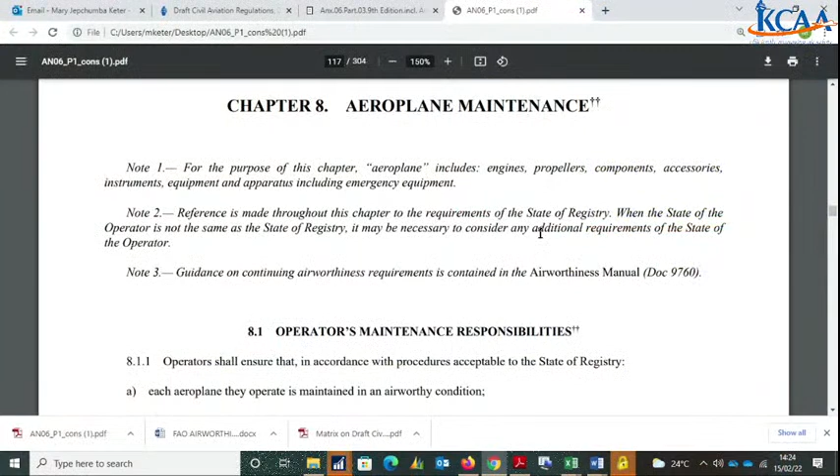We thought of doing this because one stakeholder yesterday said he had sat with even lawyers and never found where these things are. But it's good to make it clear for all of us that they do exist. Up there is from online, that's the ICAO platform, ICAO portal. We have Annex 6, Part 1. This is on commercial air transport operations. The topic there, Chapter 8, is aeroplane maintenance. It's not talking about AOC. It is the aircraft in this AOC.

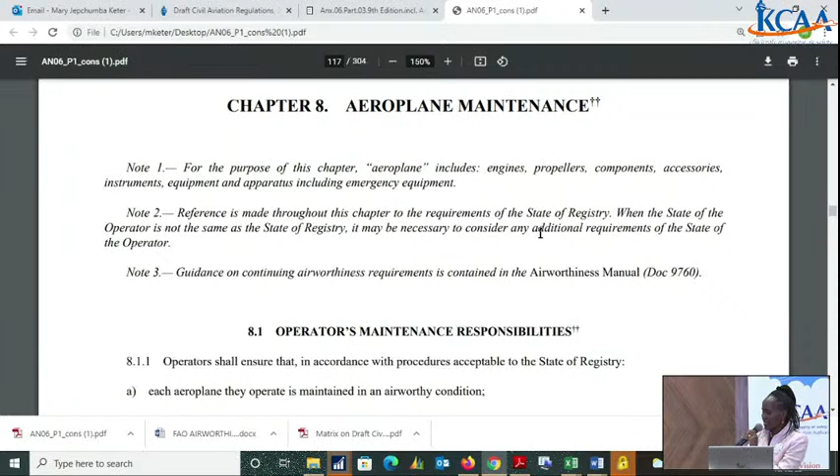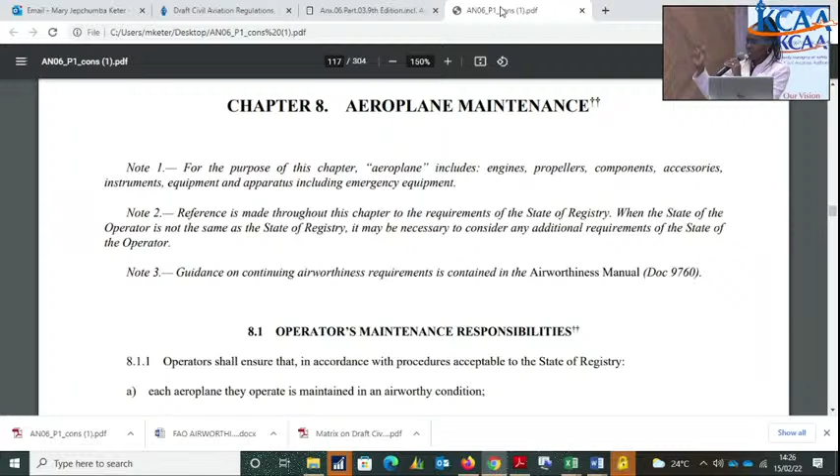So in Annex 6, Part 1, commercial air transport, and then Annex 6, Part 3 is the same, but a different chapter. It's there, helicopter maintenance. But what ICAO has done, we will use Annex 6, Part 1 as an example for the helicopter because it is a copy and paste from ICAO. The only change there is the aeroplane and the helicopter insertion in Part 3 of Annex 6. We will not read, but the title is Aeroplane Maintenance. If we go down to 8.1, Operators Maintenance Responsibility.

We are highlighting this because when the floor says the work of an engineer is just to open panels and screws, we want to demystify and really know what is the role of an operator when it comes to maintenance of his aircraft. If you look at 8.1.1, it's pretty straightforward. And these are standards. They are not recommendations by ICAO. That 8.1.1 we have already taken on board in the AOC and administration regulations and operation of aircraft regulations for commercial air transport. The operator shall ensure that, in accordance with procedures acceptable to the state of registry, there is A, B, C. That is the role of an operator.

8.1.2 has since been superseded. The end of it was until 4th of November 2020. So in our regulations, you will still find that requirement, but through this amendment, we are inserting the new requirement of 8.1.2, which we have already inserted. That's a new regulation. It says 8.1.2, that as of 5th November 2020, the operator shall not operate an aeroplane unless maintenance on the aeroplane, including any associated engine, propeller, and part, is carried out, A, by an organization complying with Annex 8. Annex 8 in this case is the AMO regulations, which have again been amended in line with Annex 8, Part 2, Chapter 6.

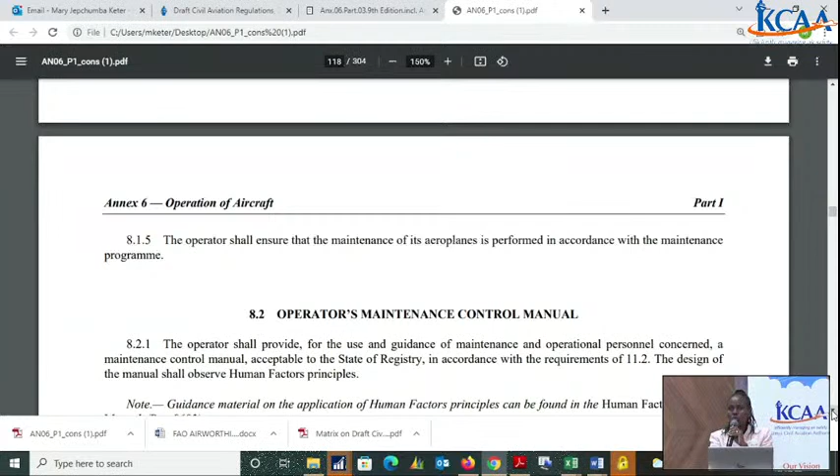Maintenance Control Manual, which is an AOC document. AMP is an AOC document, not an AMO document, as per ICAO standard. So if we are doing otherwise, please, this is the standard.

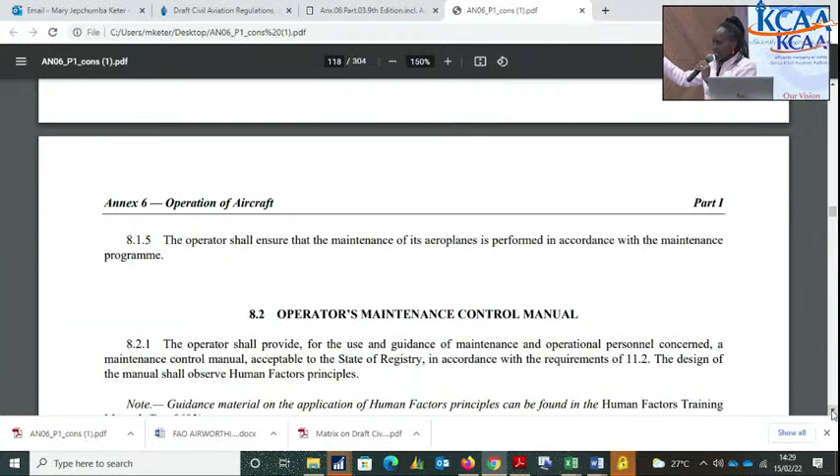And because one document which was mentioned was the one mentioned in 8.2, which is the MCM, we will not read, but the MCM should be in accordance with the requirements of 11.2 of this annex. Down at 11.2, you will still find the same things mentioned up there. Those topics should also be in the operator's MCM. But of key is the implementation. Now this is the annex.

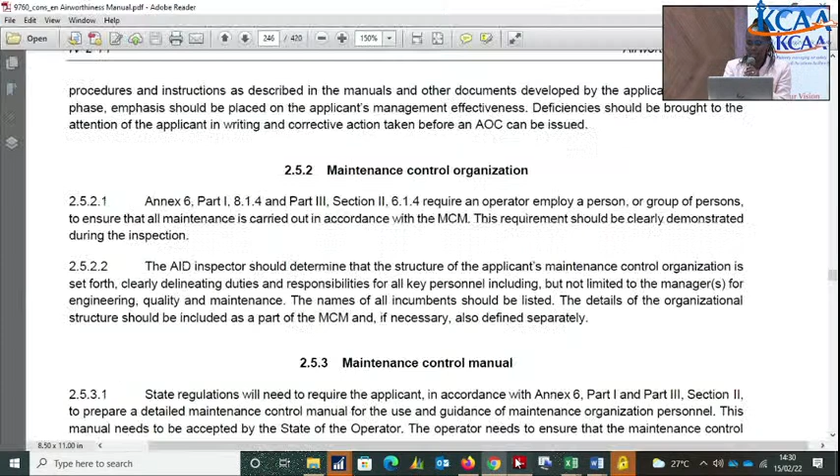This is the standard. You have to go to the implementation, which is given by ICAO in ICAO document number 9760. If you continue reading the annex, it will send you to ICAO Doc 9760, and it sends you to 2.5.2. Annex 6, Part 1, 8.1.4, where it was calling for employment of a person or persons, and Part 3, Section 2, 6.1.4, which is the helicopter maintenance, copy and paste as is, require an operator employ a person or group of persons to ensure that all maintenance is carried out in accordance with the MCM. This requirement should be clearly demonstrated during the inspection.

2.5.2.2 is now where the management personnel comes in. The AID, in this case the Airworthiness Inspector, the inspection department of KCAA, should determine that the structure of the applicant's maintenance control organization is set forth, clearly delineating duties and responsibilities for all key personnel, including but not limited to the manager or managers for engineering, quality, and maintenance. The names of all incumbents should be listed. The details of the organizational structure should be included as a part of the MCM, and if necessary, also defined separately. Is that short and clear? This is what we seek from the floor.

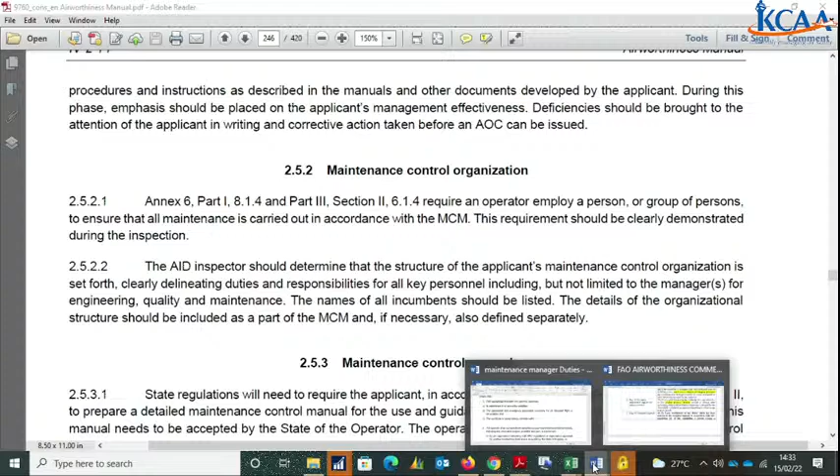Then it looks like this manager engineering and maintenance manager is not just any other liaison officer. It has to be somebody with those qualifications to do the duties which have been given. And you can see here clearly that the names must be there. Currently, we don't have those names because of the confusion. We take the aircraft to the AOC, dump it there, and go. But we've been given functions by ICAO, a few of which we have just sampled as a department, to see what are some of these duties of head of maintenance.

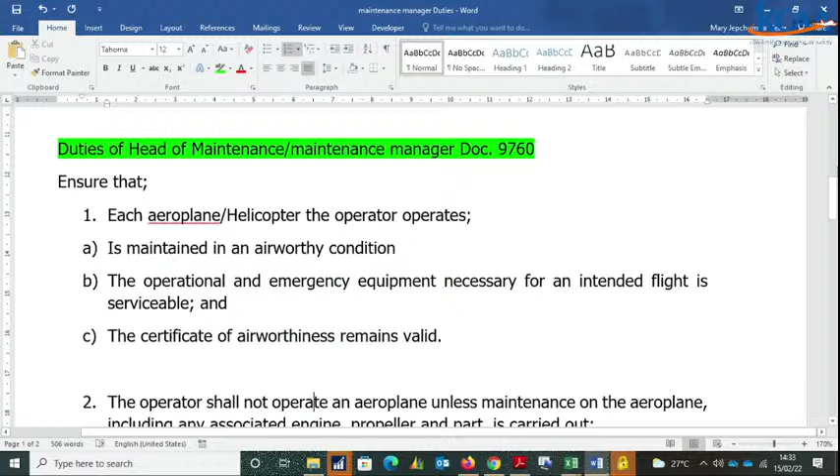One is to ensure that each aeroplane or helicopter the operator operates is maintained in an airworthy condition. Who will maintain this? It's a joint task. AMO will do the real maintenance, but again, even the AOC holder has a part to play on this side. And B, ensure that the operational and emergency equipment necessary for the intended flight is serviceable. It goes on and on. The list can be very long.

If you look at number C, the certificate of airworthiness remains valid. I don't think the AMO cares much about your CofA. Yes, they will take the aircraft, do all the maintenance, but whose responsibility is it to make sure that you apply for CofA renewal, issuance, all those things? So it's the role of this operator.

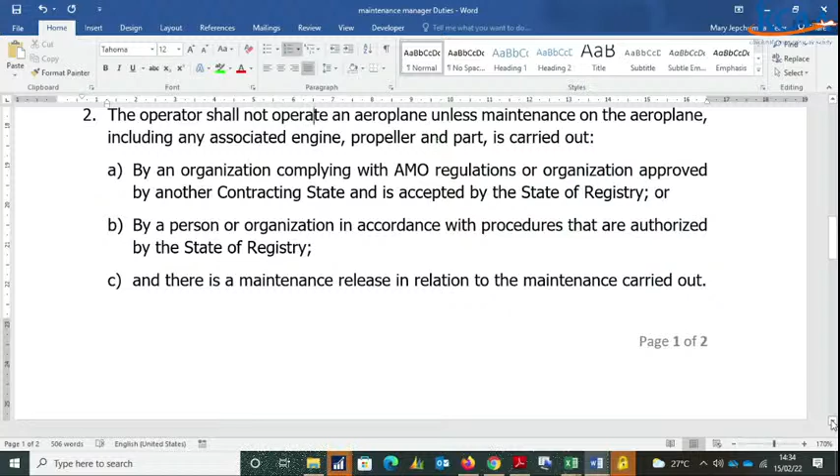And then if you look at number 2, a maintenance person will ensure that the operator shall not operate an aeroplane, as we have discussed up there, unless it is maintained by an approved maintenance organization or signed off by a person or an organization that has been approved by the authority.

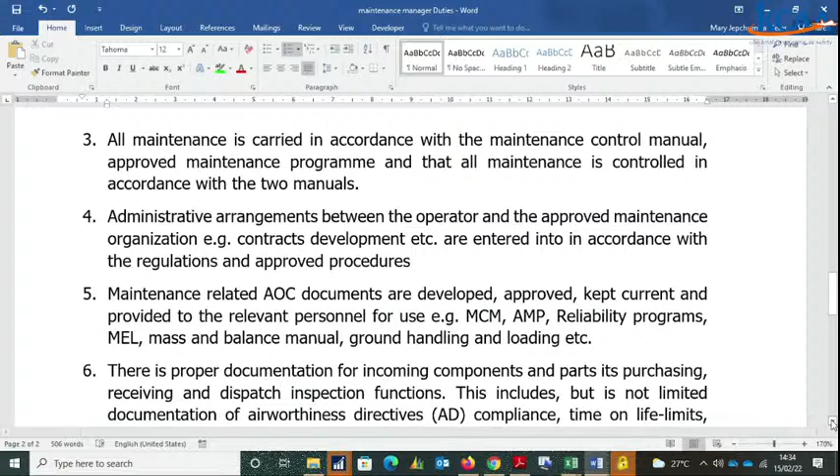3 is all maintenance. Ensure that all maintenance is carried out in accordance with the Maintenance Control Manual and approved maintenance program, and that all maintenance is controlled in accordance with the 2 manuals. 4, that administrative arrangements between the operator and the AMO, e.g. contract development and approval or acceptance, are entered into in accordance with the regulations and approved procedures.

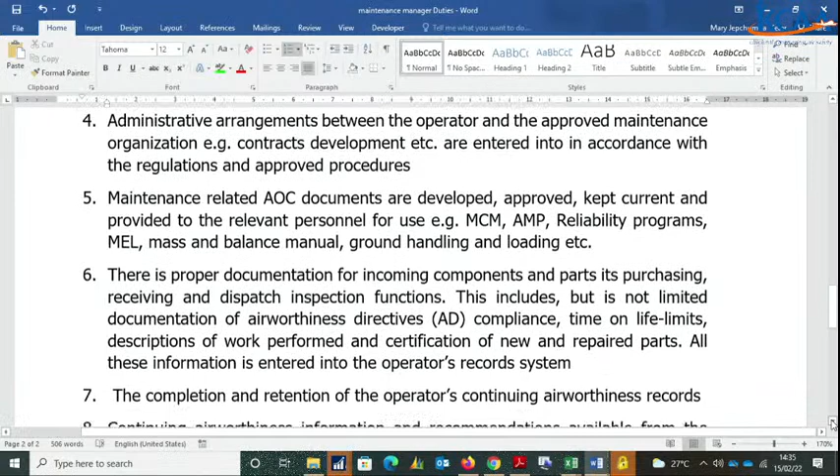5, maintenance-related AOC documents are developed, approved, kept current, and provided to the relevant personnel for use, e.g. MCM, approved maintenance program, reliability programs, MELs, mass and balance, ground, and all those manuals that we all know. So this list can go on and on. KCAA has not shared this list with you before, and that is why, even when we are approving your MCMs, every operator has a story to tell. We want to work together as a team.

And finally, I think with this kind of submission, we are all knowledgeable and we are all refreshed, so that the issue of qualification of that maintenance manager should come out clear for all of us, so that it doesn't look like one team wants you to do this and another one that. This is what we all want to stand by. Thank you very much.

Yes, I mean. I'm saying, eh? Yeah, sure. It's there. Yeah, it's a Word document, and we mentioned it's there. The doc reference is 9760. Please read through it. This is the Word document. Just project. Oh, okay.

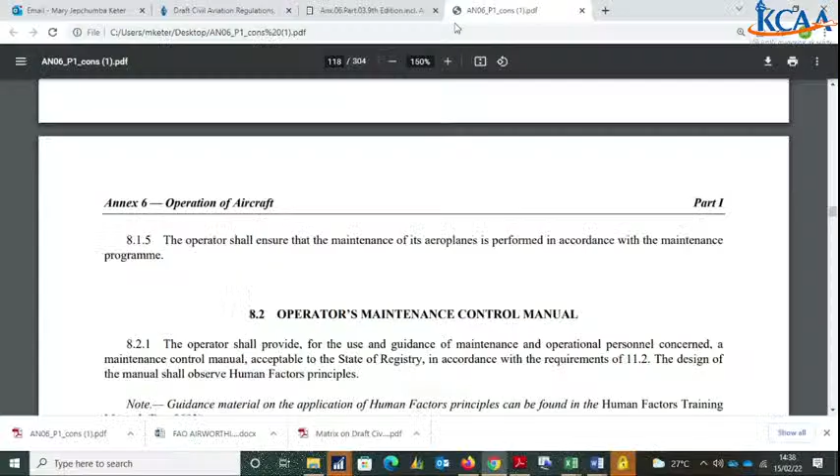Major, you go to Annex 6, Part 1, Chapter 11.2. Yeah, it's there. Projector. So the operator's MCM is where you get these duties and responsibilities. So what we will want you to do is, because they are referenced all over, it's Annex 6, Part 1, Chapter 8.1, the way we've read. It will send you to the same Annex, 11.2. On helicopters, you go to Chapter 6, and this document will send you to ICAO Doc 9760. You read together.

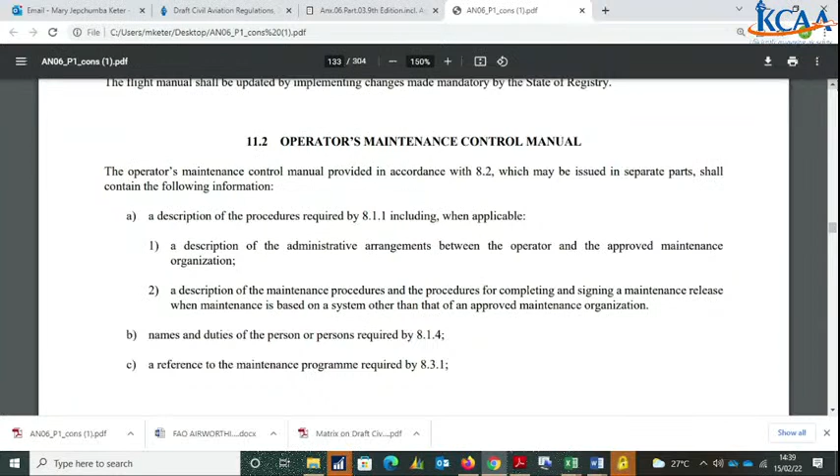Any other question? I mean, you don't seem satisfied. But we were reading at 8 point. Yeah. That's why we are saying, yeah. I'll give you shortly. Any other question? If we are okay? I've got a question here.

Yeah, okay. My name is Captain Gumo from Hawaii Aviation. I've seen the ICAO document there, clearly specifying the person, but I have a problem with the competencies that have been put by KCAA, because that job is purely administrative. Thank you. We've taken your comment. It's purely administrative. My team is writing, eh? Okay. There's somebody there, kindly, then we can answer.

Okay, thank you. My name is Engineer Thairo Moge, an independent contractor and technical representative. Now, I think the big thing here is about the qualifications and also the job roles of this person. If we start from the job roles, that's what will give us the direction of the qualifications for this person. Because from last year, this year, it seems it's being taken as a very administrative job, while it's a very technical job. You've included the MCM. In Kenya, we don't have what we call in Europe CAMO, Continuing Airworthiness Management Organizations. I hope we'll reach there one day. But currently, the only thing you can do is have the maintenance manager.

Gishuki, when you are handling an organization that is both an AMO and an AOC, it's pretty straightforward, because ICAO allows that even an MCM and an MPM can be one document approved by the authority, though the MCM is now supposed to be accepted, not approved. So it allows that both documents can be put into one book. Also, quality can be done as one, as long as they meet the qualifications of being quality for the AOC and quality for the maintenance.

But the bigger case we are dealing with in Kenya is that most AOCs are not the same as AMOs. They go out there to look for aircraft maintenance services. That's where we need to work out a technical guide, which currently they don't have, especially on management personnel, because the only document there is an order for the inspector number 26. We now need to change that to bring it on board and talk about what we are talking about.

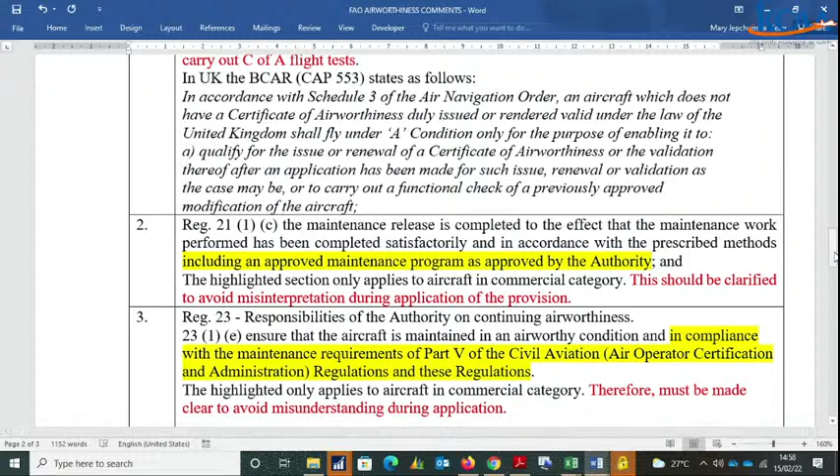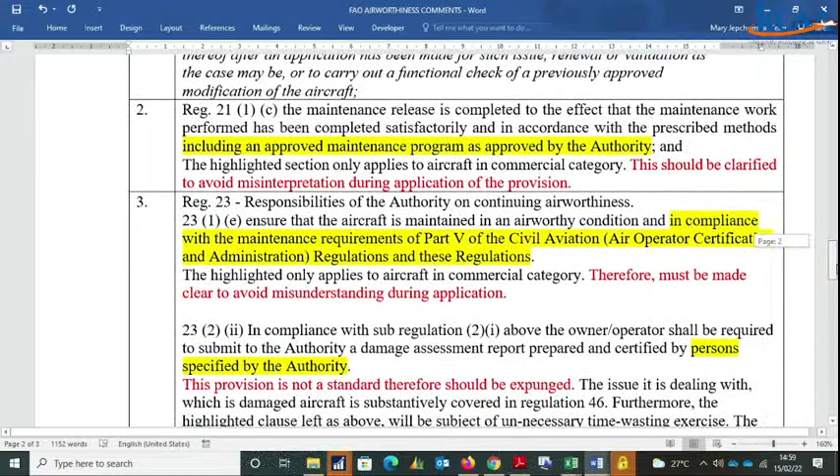The second last items were about the aeronautical user fees and the appeals tribunal, which was addressed yesterday, and there were some comments from Mr. Opot regarding Regulation 20 on the Certificate of Fitness, and 21, where he needed more input and further interpretation. The last two items are around Regulation 21 on the maintenance release. Mr. Opot was saying we needed to clarify it. This clarification will come in terms of technical guidance material, which we'll be able to issue.

Some of these recommendations that were put forward, we deliberated with the department, and we will have further deliberations with Mr. Opot as well, because some could not be inserted in the regulation as is, but we'll be able to put them in the technical guidance material.

We also had comments from KQ. Theirs was just an acknowledgement of the movement of the validity period of the C of A from 12 months to 24 months. They stated that it was much appreciated and most welcome. Thank you.

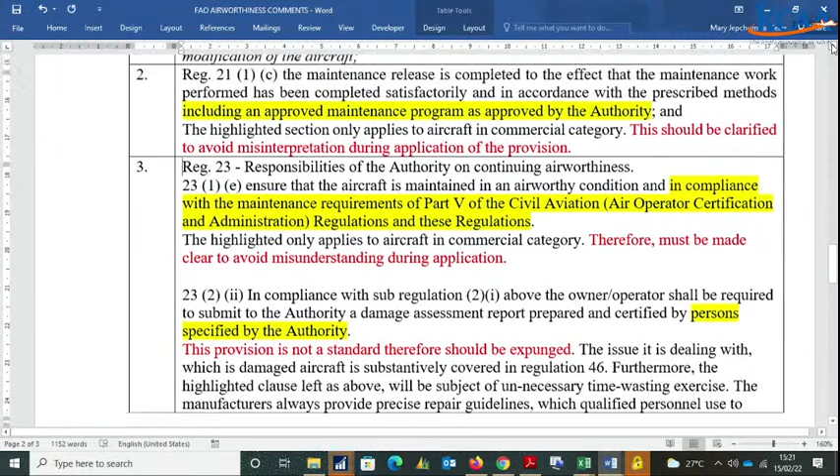Now, 21.1, I hope you've taken into consideration the 21.1C. Yes. I just wanted it, because airworthiness regulations are for all aircraft. So I just wanted a clarification when you come to the ground. Okay. 23 is a curious one. These are the responsibilities of the authority on continuing airworthiness. This 23.1E, to ensure that the aircraft is maintained in an airworthy condition and in compliance with maintenance requirements of whatever, all that.

The highlighted only applies to aircraft in commercial category. That's what we are saying. Because I think that is clear the way I put it. This just to avoid misunderstanding.

23.2.2. In compliance with regulation 2, sub-regulation 2.1 above, the owner shall be required to submit to the authority a damage assessment report prepared and certified by a person specified. No, I'm proposing we remove that person specified by the authority, because this person has always been known to be the qualified engineer who can do this assessment and give out a report for purposes of repair.

So I think this provision actually is not even a standard. I don't think it's a standard. It should be expunged. The issue that it is dealing with is to do with damaged aircraft. And damaged aircraft is already dealt with under the same regulations, but number 46, regulation 46. So let's have a look at that, because it has connotations which, when now you are talking of person specified by the authority, it has some